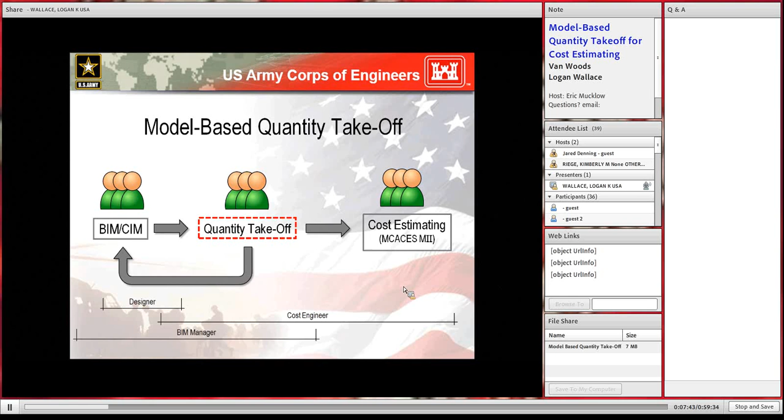And I should have shown in this slide also that there's a review process where the person performing the takeoff and the estimate is back checked by either a cost section chief or another cost engineer, so that the QA/QC process is also relevant. So when we're talking about quantity takeoffs as a separate kind of activity, these are the types of things we would envision needing to happen in that stage of a process.

So again, when we start at the beginning and look at the authoring content in our design process, we perform things like the project execution plan and M3 for the minimum modeling matrix to manage the process. And all of those on the left should be fairly familiar to at least the BIM audience in the crowd. And for the estimating side, these would represent the typical estimating activities that will occur in the absence of a BIM workflow. The quantity takeoff is attempting to streamline some of the things that are either done manually or done with automation, but are still requiring a manual component to them.

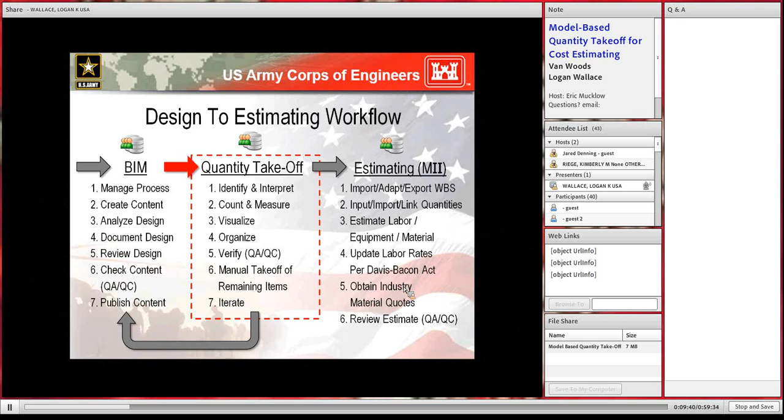And we'll go through in the next section, when Logan demonstrates some of these ideas, what we specifically mean by these. These aren't meant to be a sequential series of steps by any means. It's just to highlight that there are 7 key areas that we're targeting. And there's a real emphasis on QA/QC and iterations, because the idea of being able to trust the data is paramount for cost engineers. It's built into their regulations that they're responsible for verifying quantities. And then also the iteration aspect, I think we see as being a key feature of this process that will help speed up the process significantly with features such as change detection and things like that.

And really, this is what I was alluding to earlier, this is a lot more than takeoff for estimating purposes. This is really about information management. And if you think about BIM as a database, and you think about some of these other downstream activities as also having ways of representing and storing data, this is really trying to determine how we can get from one to the other, while ensuring that the accuracy is maintained, and that there's no implied understanding of what the values are that are coming out.

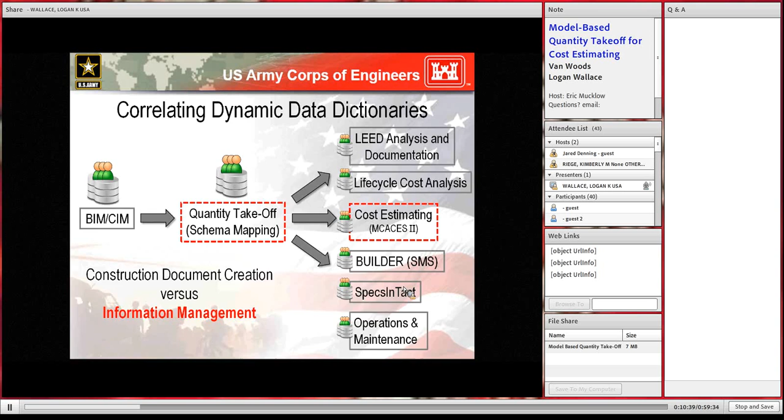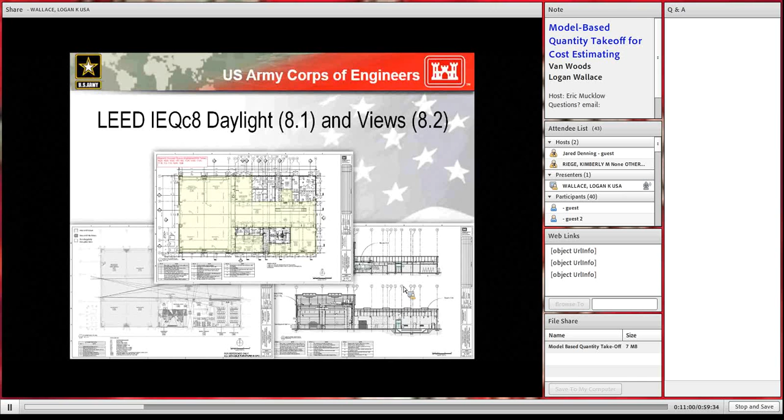So, for example, probably applicable to this audience is things like LEED analysis and documentation and life cycle cost analysis. We've done some initial examples that are probably familiar to any of those that have done LEED documentation, some very simple examples: the middle example is the regularly occupied spaces, and lower left would include things like the sight lines for IEQ C8 for daylighting and views. And those require that you then go into a spreadsheet and enter in this data, which is about the exact same data that would be required for a lot of other downstream uses. So a lot of this is standardizing our data so that we can apply it for downstream use without having to manually re-enter information. And you'll see on that right example that we actually calculated the area of direct line of sight vision, so that was using an area plan, and these are all calculated values.

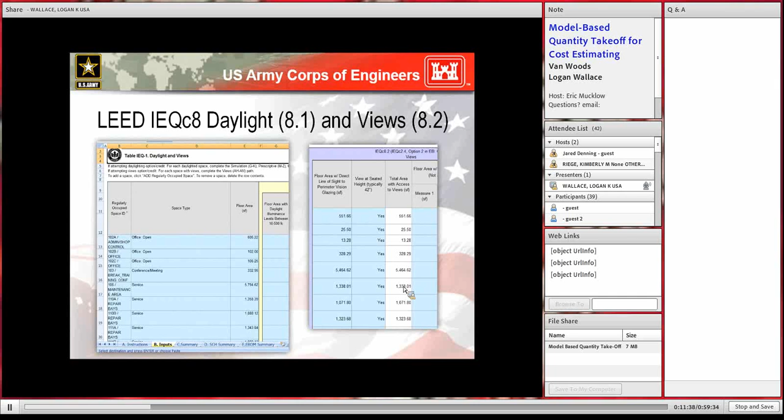So I came up with some, quote, sustainability principles of data. I really like the idea of reduce, reuse, recycle, and the idea that essentially we are trying to reduce the amount of duplicate entry of data, or any wasted effort. And there are numerous cases where, whether we are talking specifications or design analysis or structural analysis, a lot of downstream uses are having to manually enter in the same data and keep them synchronized, which is even more difficult through the life of changes and the project.

Garbage in, garbage out. Unfortunately, this does not follow the sustainability principles, does not turn into compost, so it's still the same thing. If we get garbage in, we're going to get garbage out. So we need to really pay attention to accurately defining what needs to go in, and how we can verify that when it comes out it's correct.

There is also a greater emphasis on quality and verifiable results, and we need to work on getting out of the mentality of, once things look right on the sheet, we're basically done. If we continue that process, we will not be able to really take advantage of some of these other efficiencies. And the other thing to highlight is that it's important that we have a solution that covers all of the information, even stuff that cannot be stored in the model.

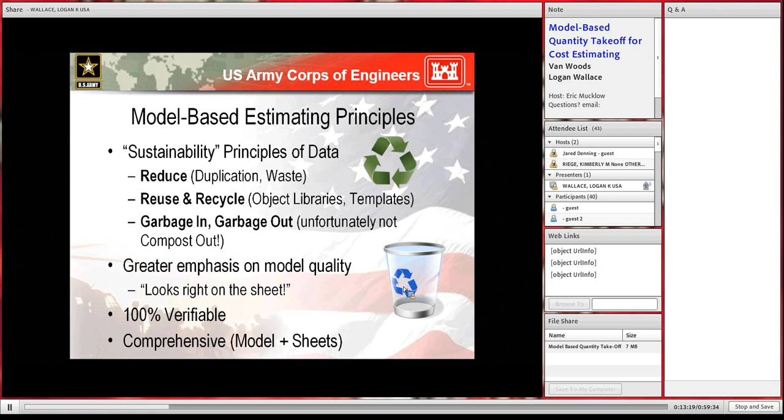And so the next two slides are just, I'm not going to go through each of these, but I get the question frequently, why aren't we using BIM data already? And so we've started to collect some of the examples of things that have kind of caused things to be difficult, and I'll just highlight a few here that we really are switching from a process of construction document generation

to information management. And things like plans and specs and DAs are one set of deliverables, and definitely the most important contract documents, but the models are the things that generate those and can also be utilized for downstream processes and affect our efficiencies significantly.

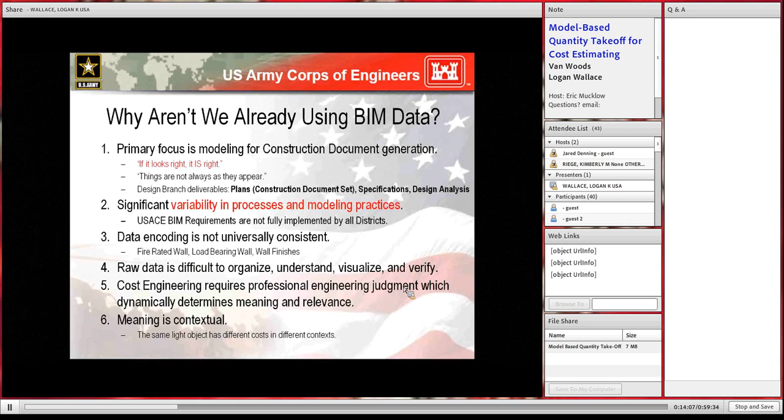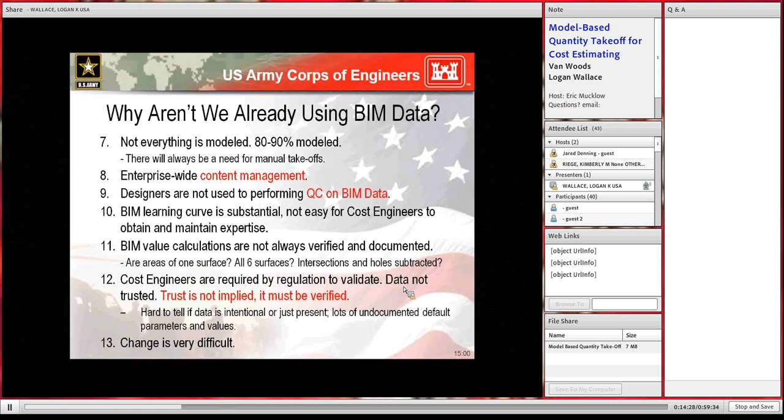I would also say that I'd highlight content management and QC on BIM data, because those are also recurring challenges, and also number 12 there, that trust is not implied. We have to have a verifiable process. So at this point, I'm going to hand it over to Logan, and he's going to show you some examples of the current and model-based processes.

So as Van said, my name's Logan Wallace. I'm a senior cost engineer in the Seattle district, and I'm going to walk you through some of the current workflows and contrast them a little bit against some potential BIM workflows that we're pursuing right now.

So as a downstream user, a consumer of the BIM data, my job as a cost engineer is to take the quantities from a model or sheet drawing set that's provided and accurately determine all the quantities and then apply cost to them to determine an overall project cost. So when I first get a sheet set, one of the first things I would do would be to identify what do I need to take off. What exactly am I looking at?

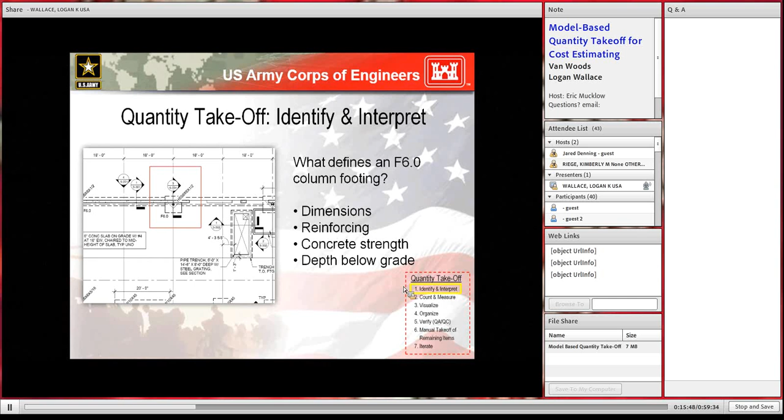So on the image in front of you, you can see I've highlighted a footing, an F6.0 footing. And the questions I ask myself as a cost engineer are, what makes up an F6.0 footing? What do I need to put into my cost estimate to determine the cost? You need to know the dimensions of the footing, how much reinforcement's in it, what's the strength of the concrete, how far below grade is it, and how do I get that in the current workflow on a 2D sheet?

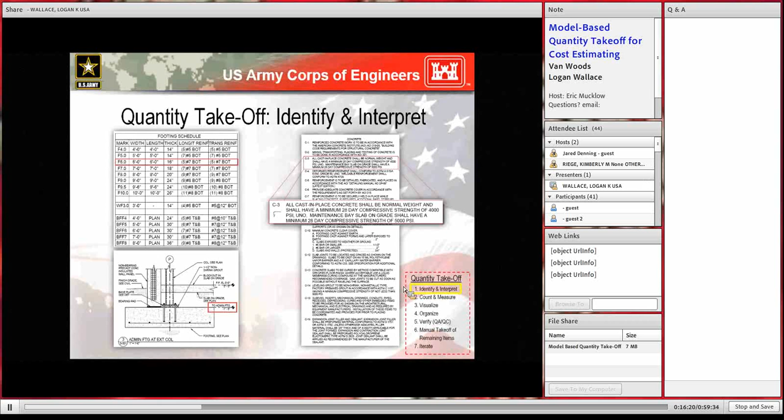I would go to things like the footing schedule. That gives me the dimensions and the reinforcement. I would go to the detail sheet, which shows me how far below grade it is. And then thirdly, I would go to the construction notes or the specifications to determine what the concrete strength is. These are three separate places that I had to go to just to determine the makeup of one particular construction feature. So why can't we condense all of this information into one localized location within BIM?

Here's that same footing pulled out of a BIM model, and you can see with one click, I can instantly see what the reinforcement is, how much, what size it is, the depth below grade. Problem is, as Van alluded to, trusting the model data. You can see right here in this particular instance, the thickness is reported as 18 inches. Comparing that against the actual drawing set where the thickness is reported as 16 inches.

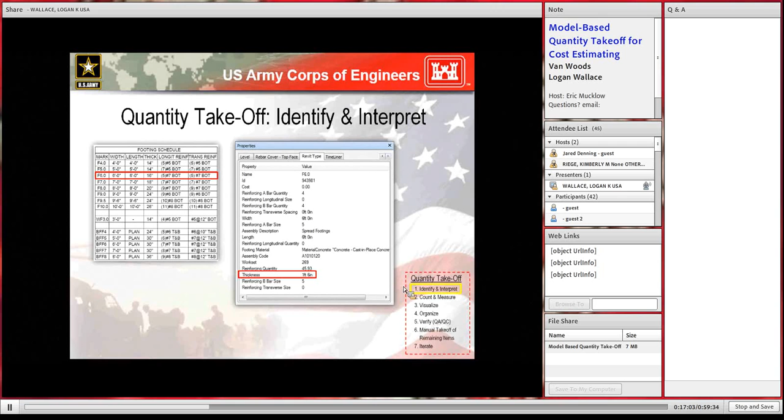So this is an excerpt of a model that we haven't touched. This is without any modeling best practices in place. This is just the current state. So I couldn't reliably trust the information that was coming from this model. So the next step of being a cost engineer is actually, now that I know what I'm looking at, now I have to actually quantify it.

So in this example, what you're looking at is an electrical drawing sheet. And let's just say I wanted to take off some of the lights on this one particular sheet. Here's a quick video I made up of what I would actually do in my day-to-day work of doing the quantity takeoffs for these lights. One by one, I go through and I click every single light that matches that particular light type. In this case, it's an RL1 light. So I'm not going to make you guys actually sit through this whole entire video and watch me click every single square there.

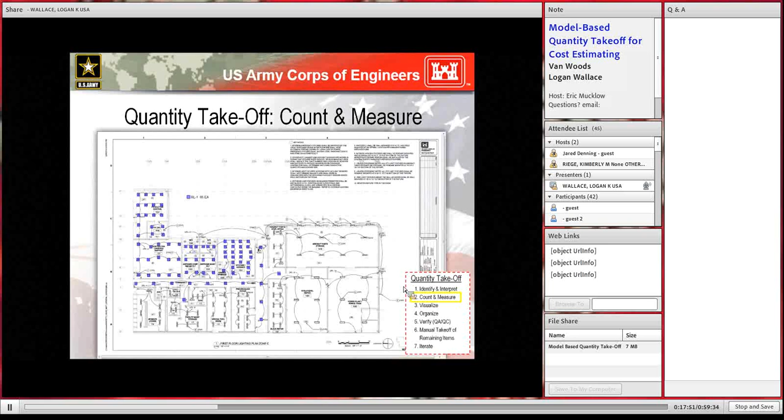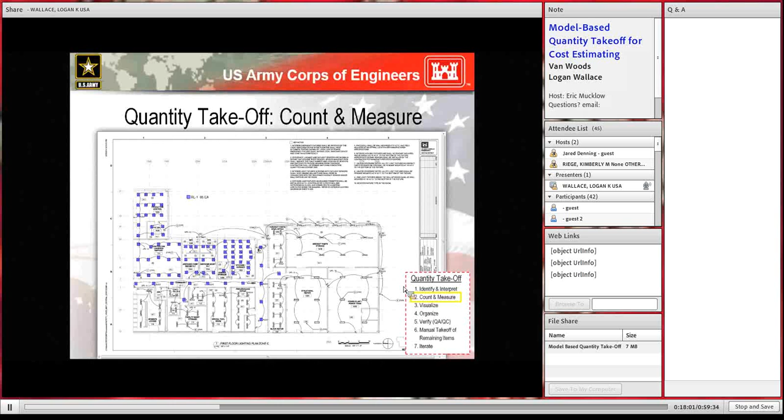First, I select all of the RL1 lights. I group them all together. I say take off to RL1. Everything processes, and in approximately 15 seconds, I determined that there were 439 RL1 lights present in this hangar.

It took me over 2 minutes to do 89 lights on one sheet, and that was me being prepared to do a recording, being familiar with the sheet, everything I was going to do, and in 15 seconds, we accomplished the entire hangar. Granted, this also revolves around me being able to trust that these RL1 lights are in fact RL1 lights and they should be where they are.

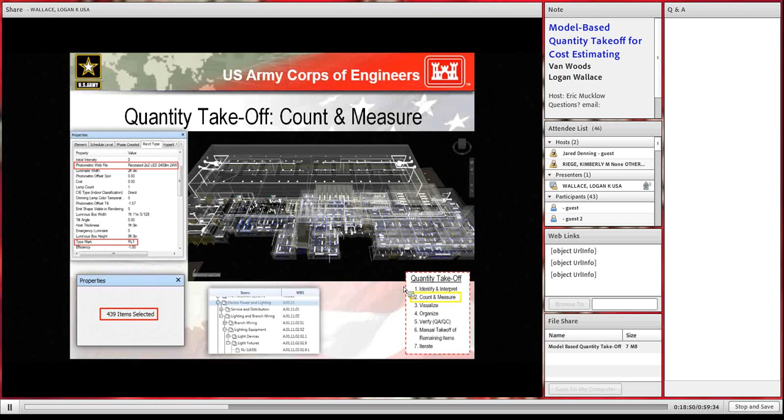So the next step of our quantity takeoff aspects is being able to visualize the data. So a big question we get a lot is, well, why can't the designers just spit out a big Excel sheet or a database from the BIM model and just give you an Excel spreadsheet that said there were 439 RL1 lights? So that's a good question, and we get that a lot.

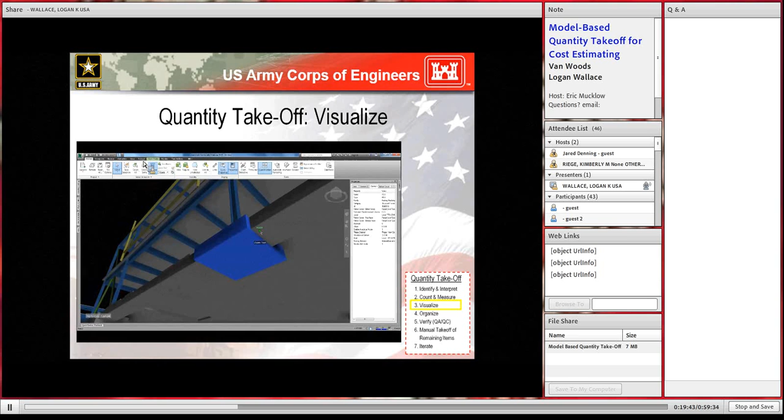The question is, you need to be able as an estimator to understand what you're reading. An RL1 light is an RL1 light, but the construction that goes into it is not the same. If you're putting an RL1 light in the 50-foot bay of the hangar, that's a lot different construction methodology than when you're putting it inside a recessed ceiling in a 12-foot high office. So here's a quick video I made of some of the visualization aspects that Navisworks is bringing to the table.

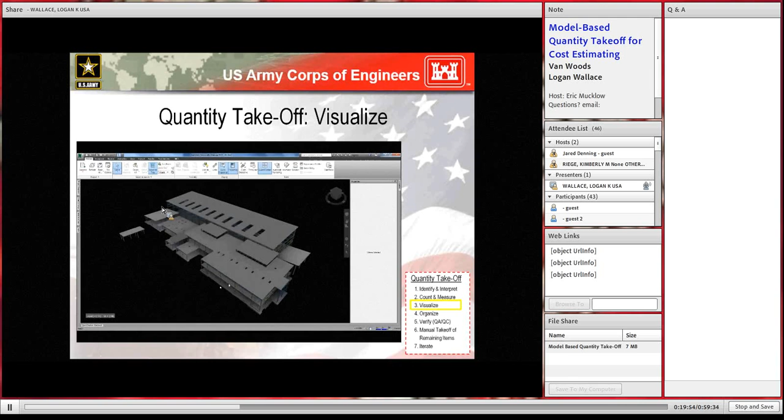So going back to our footing example, we can tie this one footing from the model, I can link it to the sheets that are coming out of the model. So I can say, where else is this item located? Foundation plan, zone A. This is the 2D sheet that we're contractually obligated to. So Navisworks and Revit are giving you the ability to

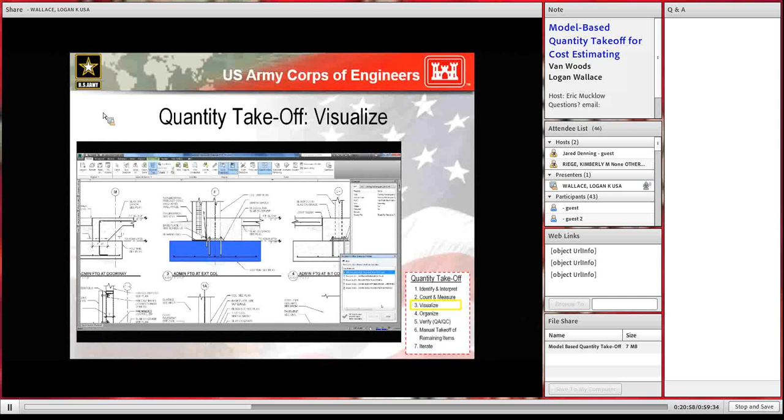dynamically do your takeoffs between the sheets and the model at the same time. So I can instantly go and I can look at the detail of this. I can go back to the model. I can do my actual takeoffs. So let's see what that looks like in practice.

This is a 2D sheet from the hangar. Let's just take off all of the footings from the model. After you take off the footings from the model, you can then dynamically update the sheet to reflect the takeoffs that you've done. This is the sheet with all the takeoffs, all the footings taken off. And let's just hide all the annotations and the markups.

This is the same 2D sheet, and now visually I can look at the contractually obligated sheet, and I can see that from the model, I have taken off all of the reinforced foundations. But there's still a few things left, and those things are just the walls, and if we'd gone through the wall takeoffs, this sheet would be virtually blank right now.

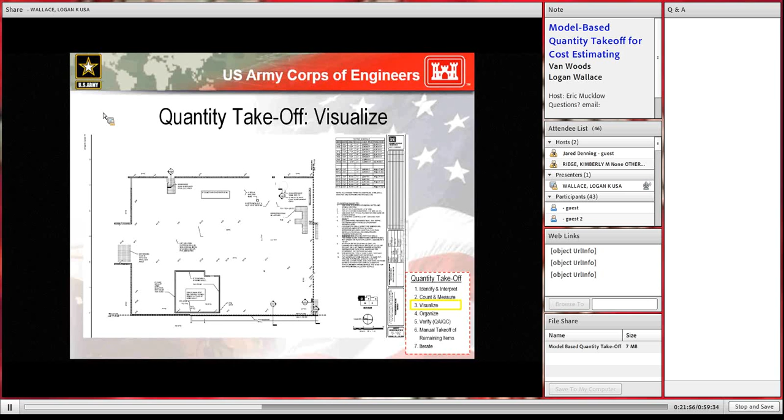This is just another aspect that Van touched on of QA/QC. I can now do all of my takeoffs in the model environment, but still verify that I captured everything in the contractually obligated 2D sheets. So we've done all of our takeoffs. We have all the quantities. The next step is, what are you actually doing with them? And this kind of touches on why can't we just get a data dump straight out of BIM.

On the left side of your screen, you'll see that this is the quantity takeoff catalog that comes out of Navisworks. This catalog is user-generated. I can make it look however I want. On the right side of the screen, you have the work breakdown structure from M2. This structure I can't alter. This is mandated by regulations.

What doing our takeoffs in BIM is allowing us to do, though, is to create a mirror between the two, which ties them together. So now I can have a matching catalog in Navisworks that matches the structure that I have in my M2, which allows a faster QA/QC process. Now a reviewer can go down, have the Navisworks open on one side, the M2 open on the other side, and sequentially go through and make sure that all the quantities are where they should be and they match.

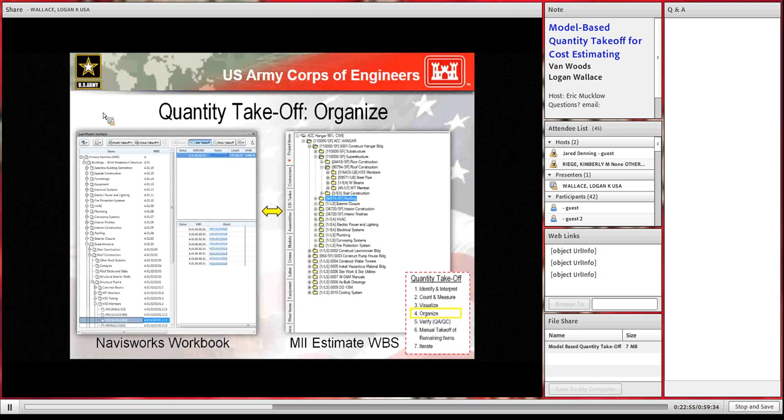Moving along with the QA/QC process. This is a drawing from an architectural takeoff that I did. When I'm all done with my estimate, I wrap it all up and submit it to my boss for review. What I give him is my M2 file that has all my cost and estimating data, and I give him my takeoffs that show him where I actually derived all the quantities from.

What my boss has to do now is look at a sheet just like this and basically determine if I made any mistakes. Now you look at this jumble of colors and lines, and granted, there's some tips and tricks you learn from doing this for a while to make the review a little bit more streamlined, but this is still just a visual review process. Somebody has to visually look at this and try and determine if maybe those teal colors should be red, maybe that's a different door type, maybe the floors were taken off wrong. This is very difficult to digest as a reviewer.

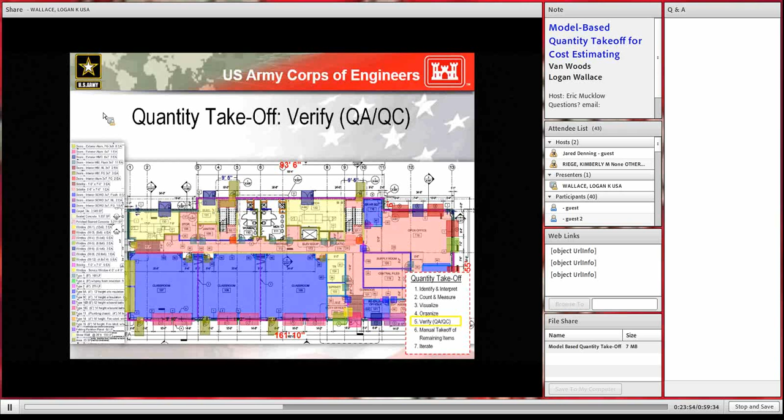BIM gives us a lot of additional tools that allow a reviewer to quickly QA and QC a model, and this is all assuming that modeling best practices are in place and we can trust the data coming out of the model. Right here in this example, you can see I selected all of the walls that are type CB. You can see there are 152 of them. I can get the area quickly and immediately, and I can do this for any construction feature that's in the model. Walls, windows, lights, door types, pipes, you name it.

And very quickly and accurately, I can determine, as a reviewer, that the estimator is using the accurate quantity. And this allows me to focus more of my time and energy on ensuring that he's developing accurate costs rather than trying to make sure that he is developing accurate quantities.

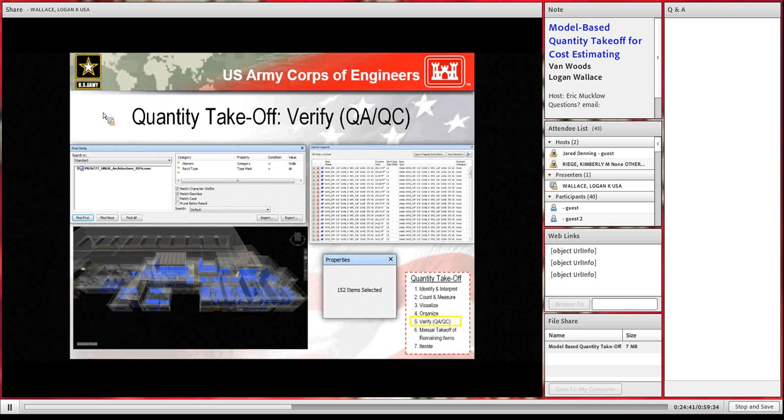So back to our example now. Van touched on it briefly. We're never going to model 100% of a building. There's things that are below the minimum modeling matrix, things like 1.5-inch pipe and just other features. You can see on this sheet, we took off all of the footings and the wall foundations. The walls are left, but we have this little hashed mark area here. And what this represents is depressed slabs in the sheet. These were actually put on the drawing sheet as a texture. This is not a modeling object.

But let's just say we still need to take it off. We still have the 2D tools available within the workflows to add these takeoffs to our 3D quantity takeoffs. So what we're proposing isn't completely eliminating 2D takeoffs. Those will still be there for things like this example where it's just not going to be in the model. What we're working on is an integrated solution to really have a BIM-centric takeoff solution with just 2D supplementing it where needed.

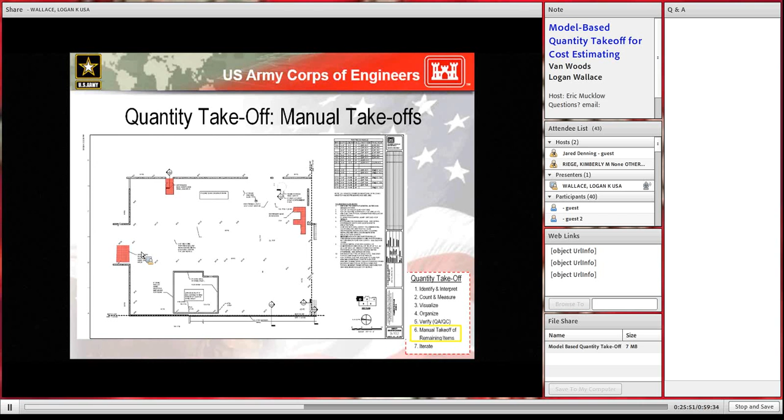So another piece of the puzzle is iterations. Typically, for a standard Milcon project, we might do an estimate at 35, 65, 95, 100%, and then at the IGE phase. So when you do all of your takeoffs at a 35% estimate, and then the new iteration comes out at 65 or 95, what are we asking an estimator to do? Does he have to now recreate the wheel and do all of the takeoffs again and repeat all of that work?

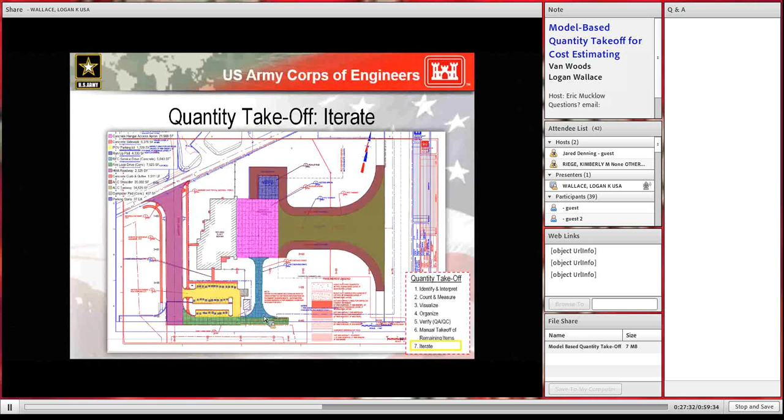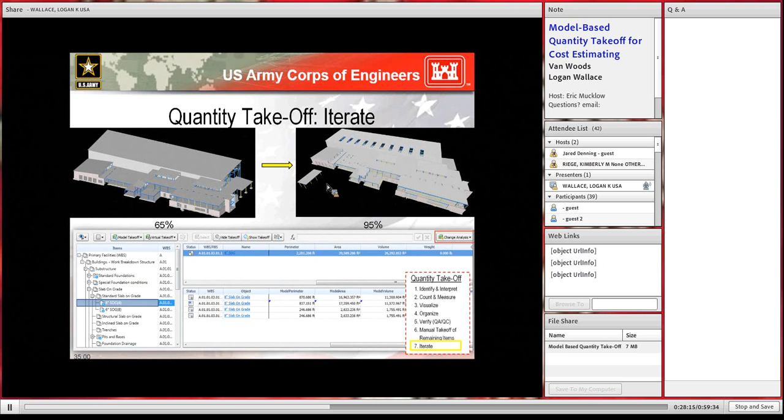So let me turn it back over to Van to talk about the work that we're doing now and what's next.

All right, thanks, Logan. So what we're going to be talking about now is an initiative that is being funded by headquarters. So Scott Wick has funded an effort to look at producing production-ready material for all disciplines. And Ray Lynn from Huntsville headquarters Cost Center of Expertise has also been funding this effort for a long time with Karen, and I believe both of you guys are on the call, so really appreciate that continued support for that.

And Jason Fairchild is also participating in shaping this effort as well, and he's our BIM Community of Practice lead. And I think this is an interesting initiative because this is the first time I'm aware of that we're really bringing together design and cost engineering and BIM together to really figure out this problem. And it's really a balancing act between those three. So BIM will not be defining what cost engineers will be receiving, and it's really a balancing act to see what is needed and what's feasible.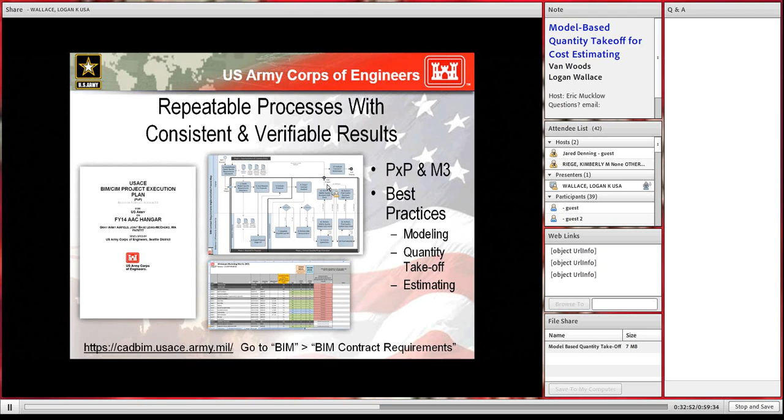And essentially from the estimating requirements, we will then be analyzing the modeling best practices, quantity takeoff best practices, and estimating best practices that would be required to consistently and accurately produce those results. So the second aspect that I mentioned after repeatable processes is the data specification and verification. So what you're looking at here are, on the BIM side, two of the large activities that we are undergoing. We have started with the structural discipline, and if you look in the upper right-hand corner, there's the USACE minimum modeling matrix, which is organized by OmniClass and Uniformat.

And we're going down to level 4 and 5 to identify each and every item that we would consider to be structural in nature. For each of those, we are identifying a data sheet and a verification sheet, or sheets, one or more. The data sheet really indicates the parameters that would be required and how they would be derived, as well as demonstrating them live in the sheet that you're looking at here. So this is actually a view that has callouts to those actual parameter values.

It not only provides a way for us to define the parameters that are required, but it also gives BIM users the ability, when we publish this, to go look at the model files to see how this worked and what exact parameters were entered in order for the values to come out correctly. It also gives us the opportunity to check these assumptions and these specifications from version to version.

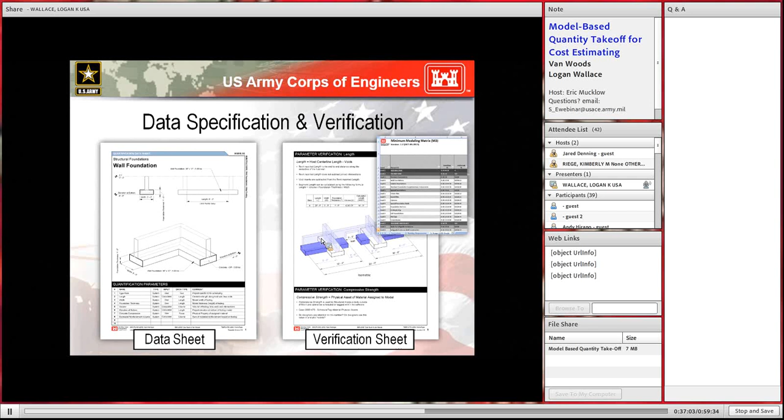So this page also shows some additional examples of verification, but it essentially still follows the same idea. So for example, on the right side, we're showing compressive strength as a material being assigned. Oh, I'm sorry, this is actually model reinforcement, estimated reinforcement being applied, and if that value is not provided, it will highlight red just to illustrate to the designer how these things work. So these are meant to go through each item and also serve as an example of how to do it correctly while modeling.

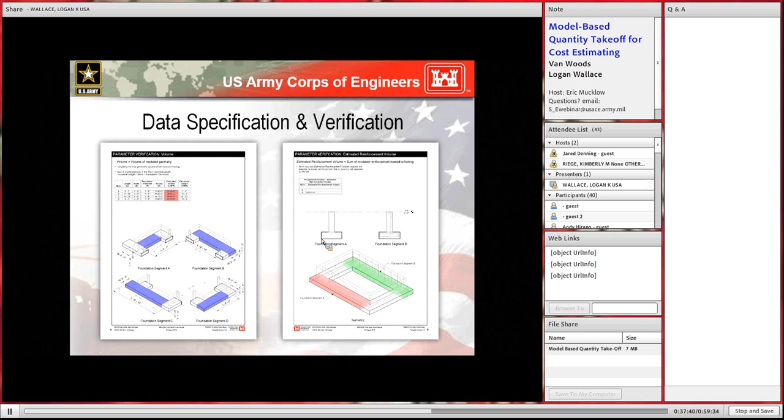And the next part is content and content management. So in our reduce, reuse, recycle kind of analogy, reusable content in the form of templates or in the form of prior projects, it's really important that we try to make sure that the most common workflow of taking something and placing it into a project results in the highest degree of potential success. And there are new templates and workspace content coming out over the course of time, and we want to make sure that these things reflect the requirements that are being identified and verified.

And we're also looking at methods for enterprise-wide BIM content management, where instead of a template carrying all the potential families, you're looking at an example here of a tool called Content Studio that might be able to assist with the process of something going from being a reference library, like a delivered Autodesk out-of-the-box library, being then copied to a particular project, and going through this process of being able to differentiate user-specific content on their local PC versus project-specific content versus district and then reference content, and just really trying to not prevent any of these from happening because these are necessary operations for the efficiency of a project.

Kim, can you hear us? We're trying to transition from using our headphones here. Yeah, I can hear you just fine. Okay, could you repeat the question again, please?

Sure. It says, when AEs are providing these quantities, is there a way for them to provide the quantities by sheet or by area? Is it more efficient if a cost engineer can do a QA verification on part of the total quantity in lieu of the total quantity?

So if I received hypothetically a just total quantity spreadsheet from an AE, that's not particularly useful for me aside from maybe a reality check for my own takeoffs. Like, I couldn't receive something from an AE that just said, hey, you have 500 RL1 lights. Because this goes back to the trust issue. If I turned in an estimate and it turned out that was wrong, I can't just point my finger and say, oh, well, the AE told me it was 500 when it was actually 700. So just receiving quantities from someone, I have to go in and validate those myself.

So that's why we're really working on these modeling best practices. And even once these modeling best practices are in place internally within the Corps, it's not like I can just run a magic wand on BIM and have it spit out all the quantities to me, because that's why the visualization aspect is so important to this process. I'm responsible as a cost engineer to validate that those quantities are in fact correct.

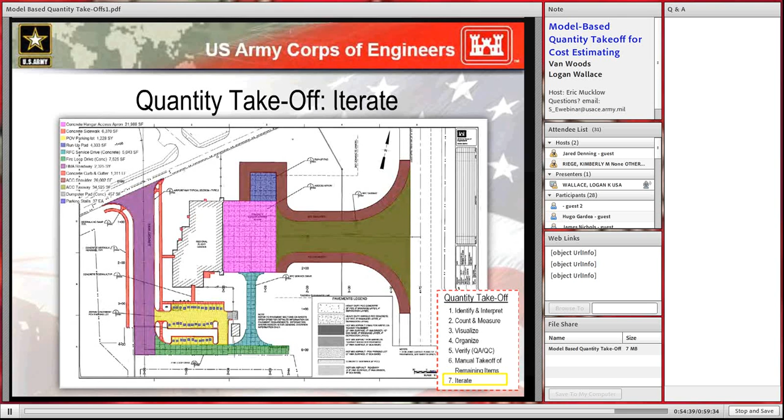On a spreadsheet it's just a 2-inch pipe. That's where the cost estimator comes in, being able to determine what that pipe actually represents. And if you just have a spreadsheet, you don't have that ability.

So Kim, could you, actually I probably have access here. Let's see. This is what I would suggest in terms of getting started. The pilot project that we completed at Seattle District was a pretty thorough 80-page documentation. It may be a little more than you want to read, but specifically in section 3 or chapter 3, it'll give you some background in terms of how we would expect to be taking off this information, where the information would be coming from, and what type of information would be needed. So I think there's a lot of information that could be absorbed there.

But again, I would also suggest that you feel free to reach out to us. We would like to receive sample models, but that's more to help our development process. If you are interested in getting started, we're more than happy to talk with you and walk you through what we've done up until this point. We will also need some review and critiques of structural disciplines and the other disciplines as they come on board.